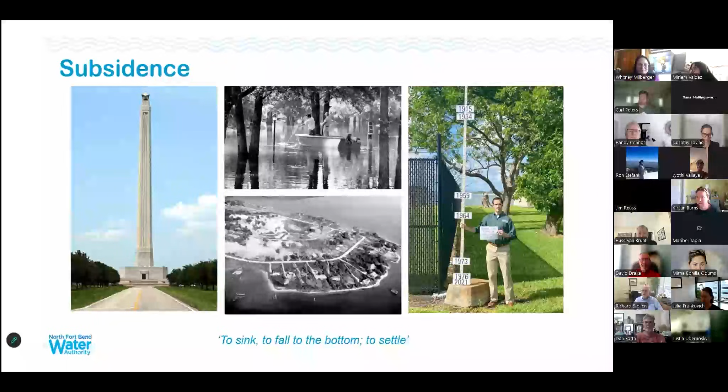And we're always looking for cool animations, ways to explain this. Julia in our office has made some cool stuff before, and I just happened to find this last week. We shared it on Instagram, but here's another animation of what subsidence is.

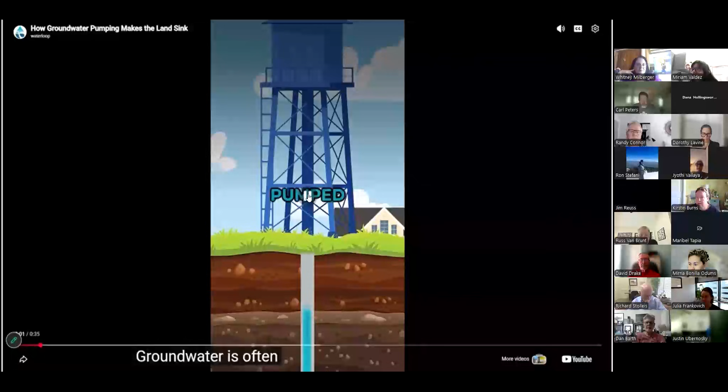Groundwater is often pumped from wells that draw from aquifers. In some areas, these aquifers are made up of layers of sand, silt, and clay saturated with water. As groundwater is pumped, water levels drop and clay and silt compact. That causes the land above to sink, a process called subsidence. That can damage buildings and roads, increase flood risks, and reduce the aquifer's ability to store water.

The timeline of how everything occurred: the creation of the Harris-Galveston Subsidence District was in 1975. I noticed it was moving westward, so the Fort Bend Subsidence District came in 1989. In 2003, the Subsidence District adopted the 2003 regulatory plan, and then we were created in 2005.

We are in Area A of the Subsidence District, and the requirement was for our submission of our groundwater reduction plan by 2008. That first conversion was 30% by 2014, which we met in a timely manner. The next one, you'll notice the difference in the time here, is 60% by 2030 - that was increased.

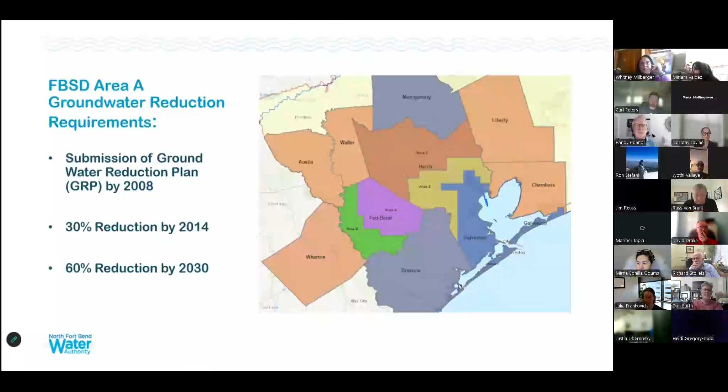Our mission, which is why we get so much into those second parts, is to provide an alternative of a plentiful source of water from multiple sources for all of us. Our board solely loves focusing, because it's so important, on the conservation and education aspect to help teach people for preservation.

Starting with the provide part real quick, just to give you an info - to start with the provide is the man who actually knows this stuff better than the back of his hand. I asked Matt Froehlich, our authority engineer, to give y'all an update on where we are with our infrastructure projects. Hey, Matt.

Good morning, and perfect timing. I was having some Zoom issues as I was a few minutes late, but glad to join everybody this morning.

Thanks, Whitney. I'll run us through some updates of kind of where we are at. I enjoy doing this because we've made a lot of progress over the years, especially on some of the regional projects, and we'll talk about some of the specifics of those.

But here on this map, we've done our best to depict some of those regional projects. Existing facilities include our Bellaire pump station, indicated with that little blue - they're little water tanks. They might be kind of hard to see on your screen, but there's a blue one right in the middle of the screen - our Bellaire pump station and transmission line. All of the blue solid lines are existing lines. Dashed lines are proposed lines that are either in design or will be in design sometime in the future.

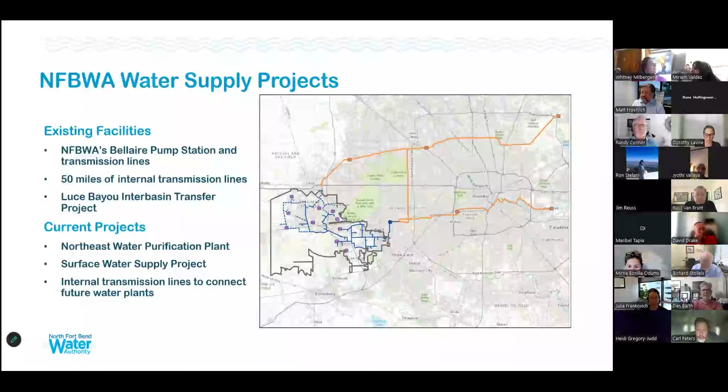So I mentioned the Bellaire pump station - the picture there is as it exists today, although if you widen this picture a little bit to the right or to the east, there is more to the plant site, but there's also some activity going on out there right now.

As it exists, we have a 48-inch intake from the city of Houston - that was that jagged line coming across. We have a 48-inch line at the very end of that that brings surface water from the city of Houston into this plant and into those 3 five-million-gallon storage tanks. We've got room on the site for 2 more, potentially a third one if we shrink down the size a little bit. We're taking up some of that space with some of the improvements that are currently underway.

To give you an idea of perspective, if you're familiar with your water plants and muds, many times those tanks are around 500,000 gallons, and this one is about 10 times larger, so not only taller but plenty wider than your typical ground storage tanks at mud water plants.

It has six 5,600 gallon per minute booster pumps. It rotates through those, but those are there to meet our ultimate capacity. Those are significantly larger than what you might see at a typical mud water plant.

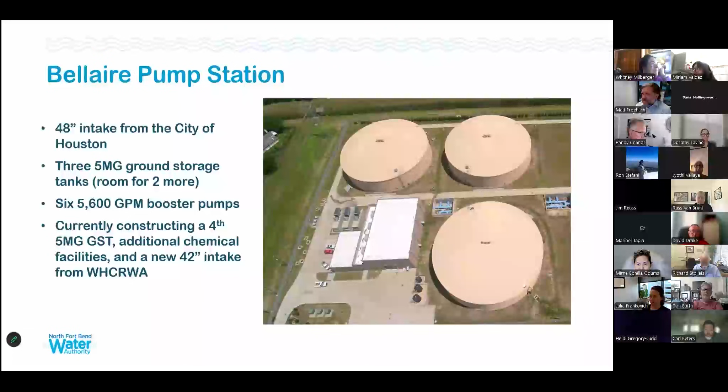All right, so our existing system - I mentioned Bellaire Pump Station with the ground storage that we have there. It's a 40 million gallon a day plant, rated to pump that much. That's where those 5,600 GPM pumps come in.

Right now we're operating, you've probably heard this in our board meetings, right around 19.5 million gallons a day. That's what our current contract with the city allows us to take. Once the surface water supply project is complete, that capacity will increase drastically, and we'll be taking a lot more water through that new 42-inch line coming in.

Our existing transmission system is shown here with the different colored line segments, and all of the aqua blue dots along the way are the water plants receiving surface water from the authority. It's over 50 miles of water line, ranging from 48-inch coming out of the Bellaire pump station down to 12-inch at some of the water plants tied in.

There are 38 delivery points serving 40 muds within the authority's boundaries. Additionally, there are reclaimed water systems within the authority that, if you attend the board meetings, you'll hear me go through the groundwater reduction plan stats each month and the level of conversion. This is where that reclaimed water comes in, and it counts as 1.5 credits.

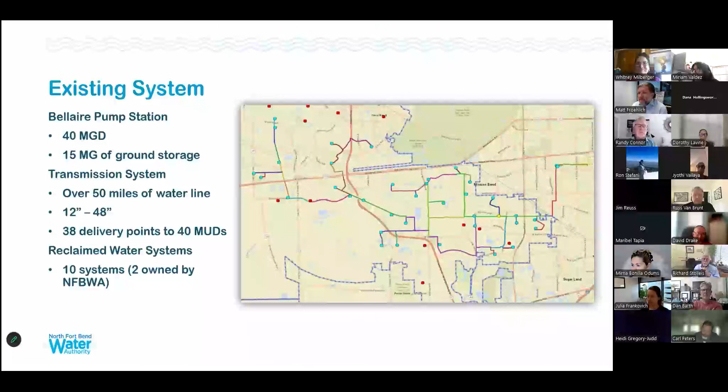So, the Luce Bayou Interbasin transfer project - here's some pictures of it under construction. It is complete and in operation, has been for 4 or 5 years now, with a capacity of 500 million gallons a day. That's a huge number when you're talking about Bellaire Pump Station pumping out 20 to 40 MGD.

That's because this is one of the regional projects being constructed in partnership with all the regional water authorities, as well as the city of Houston. So you've got West Harris County Regional Water Authority, which I mentioned, North Harris County Regional Water Authority, and the Central Harris County Regional Water Authority. For familiarity, West Harris County is basically from I-10 to 290 on the west side of town.

North Harris County is basically from 290 over to I-45. Central Harris County is just a handful of MUDs right around 45 and the Beltway area.

Also partnering in this is the City of Houston, and on their behalf, the Coastal Water Authority is managing this project along with some others. This one was a big pump station on the Trinity River, pumping water into dual 96-inch lines that go about 3 or 4 miles to the west uphill, then discharge into a series of 20-something plus miles of canals.

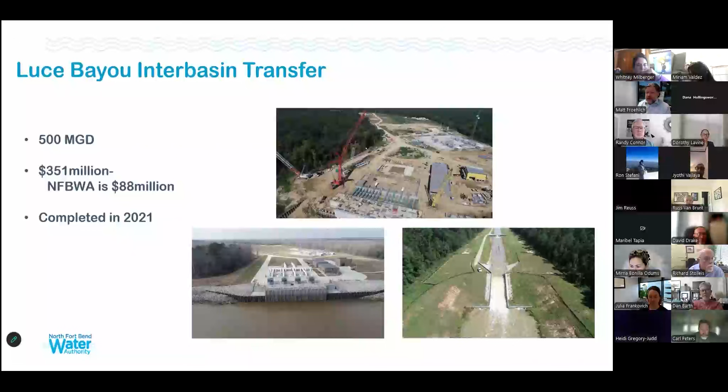That's what's pictured in the bottom right corner, a series of canals that stair step it down to the far northeast corner of Lake Houston, discharging water there so it can get into the lake, and we can pump it out at the Northeast Water Purification Plant, which is our next slide.

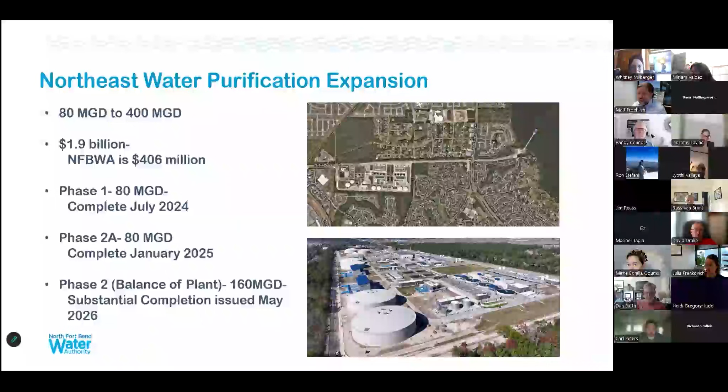A huge project. This combined with the Luce Bayou Interbasin Transfer Project, the Surface Water Supply Project, and the Northeast Transmission Line, which the North Harris County and City of Houston are building, are arguably - and I don't know that anybody's proved this - the largest regional water project when you combine them all together. Certainly in the United States, but some have said in the world. I can't prove that, but we'll go ahead and claim it. We're in Texas, we like to do stuff like that.

Moving on downstream from the Northeast Water Purification Plant is the Surface Water Supply Project, or SWIS, as I like to refer to it for short. It's composed of 55 miles of transmission line ranging from 96-inch coming out just downstream of the Northeast Water Purification Plant, down to a 42-inch line at the Bellaire pump station feed.

Coming across in the picture on the right, pretty much everything from where it says start to where the branch breaks off and heads down south along the west side of Beltway 8 is 96-inch. Then there's 84-inch running from that split over to the central pump station, the second little dot, right near West Little York and Fry Road - the central pump station, which is nearing completion as well. It's actually in operation already.

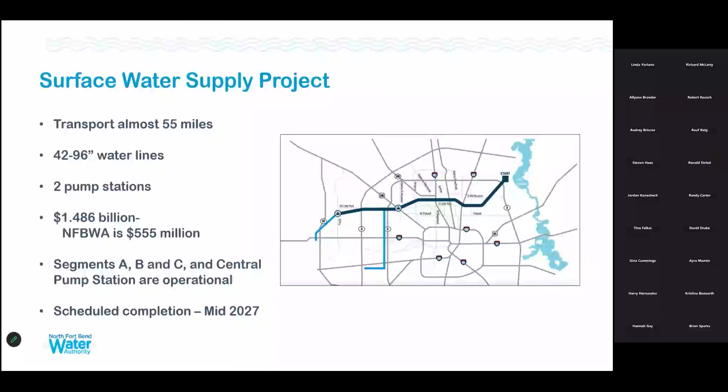A couple of projects are already complete, but those are the Kinder Morgan segments, which are the light blue line on the far west that's kind of angled down, crosses 99 and crosses I-10. That's where we'll receive water up at the north end of our system through a meter station there.

What's weirdly referred to, we jump back from letters to numbers. Segment 3 is that north-south line and then east-west line that runs along the west side of the Beltway down a CenterPoint corridor near Willcrest, kind of up and down from Westheimer, and actually not too far from our home office here. And then it hangs a right and heads west to the Bellaire pump station. That's a 42-inch line that'll feed us there.

That Kinder Morgan line is a 66-inch line. Overall cost just shy of 1.5 billion. North Fort Bend shares 555 million.

I mentioned some of it's operational. Some of the remaining projects are complete but aren't in operation because either something upstream or downstream of it isn't complete yet. That's all moving forward, and schedules show that all of that, as well as the repump station - the dot right in the middle of the screen at West Little York and Fairbanks North Houston, just north of 290 - is scheduled for completion in mid 2027. By that time, we'll be fully operational and should be receiving water at both ends of the project.

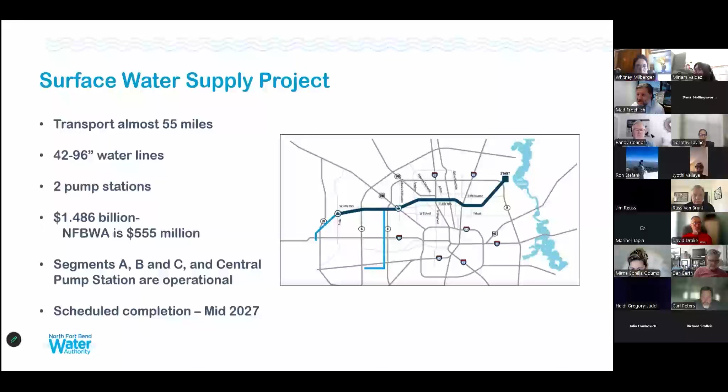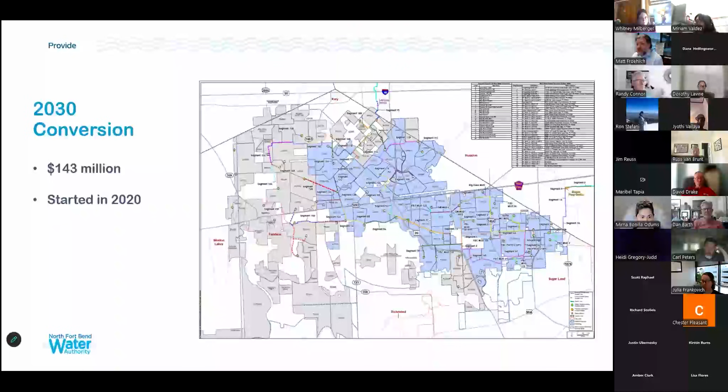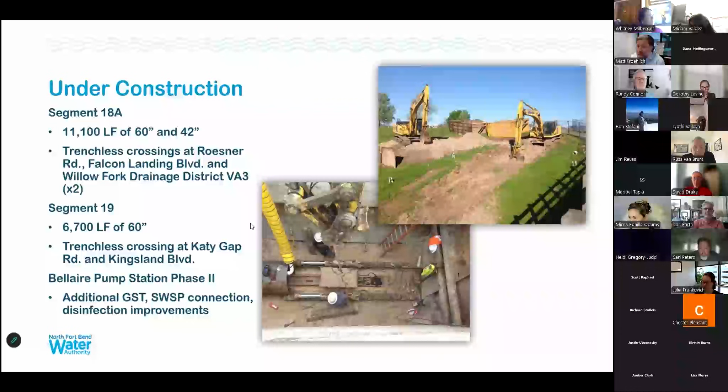Some of our projects that are what I'll call shovel ready, or very close to it, might just need some updated approval signatures if they've been on the shelf for a little bit. That includes segment 13B, which runs into the Cross Creek Ranch area and will serve one of the City of Fulshear's water plants. Segment 13C Phase 1 runs along Fulshear-Gaston and will serve MUD 229, the Candela neighborhood, a new subdivision down there.

17A runs down Greenbusch. It's a 48-inch line. It's going to come off of 18A and then tie into the rest of the system going to the west. And then 17C is another continuation of that, a branch off. If you're familiar, I think it's a Kroger at the corner of Westheimer Parkway and Greenbusch. It runs behind that and ties into a water plant, so it's a short run there.

Looks like we've got a question from John. You want to go ahead, John?

My question is, what material are you using for these pipes, and what is their estimated lifetime? Great question, great question.

Anything that's 20-inch, 24-inch, and smaller is likely going to be PVC. North Fort Bend has been in the practice, at least as long as I've been involved with it, of not specifying exactly what material a contractor has to use. We like to leave it open to a number of different materials that would work and are acceptable to us, and then just allow the prices and contractors to be as competitive as they can be. On that smaller stuff, PVC is going to be the most competitive, so it's I'd say a 99% chance that stuff's going to be PVC. Anything above that can be a number of different materials. Pre-stressed concrete pipe, steel pipe is the most likely one that'll come in. They don't make PVC that big. That's why it's all the smaller stuff.

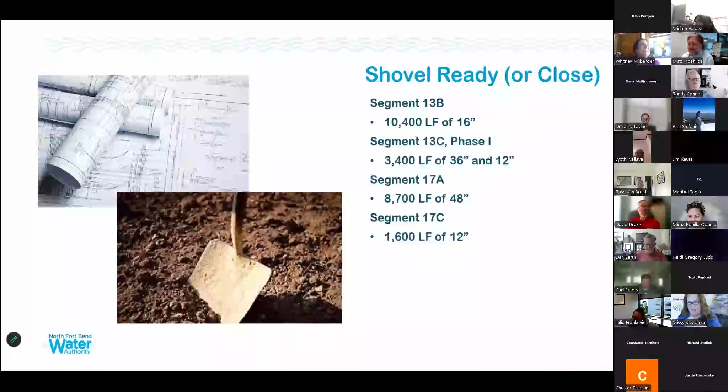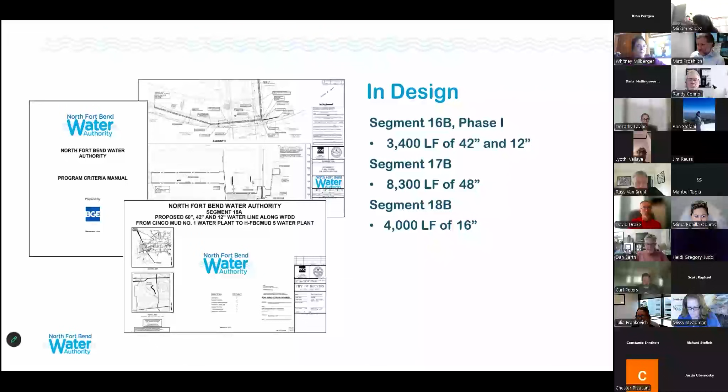So those are all progressing through design. Like I said, there's going to be some more a little bit further off. I think that might actually be our next slide, Whitney, if you can take us to the next one.

But yeah, a lot of activity. Like I said, I think we'll be in a pretty big phase of construction here over probably the next 5 years, with a steady flow of projects going to construction, and even carrying on after that. A lot of design going too as we push a lot of this forward.

Biggest holdup on these, and I know a lot of you that attend the board meetings have heard me talk about it and have seen what I'll admit is slow progress on some of it, is the easement acquisition.

We really like to be in our own easement that protects these facilities. As John asked earlier, it helps them have a longer service life, because by being in our own easement, we can control anything else that goes in there.

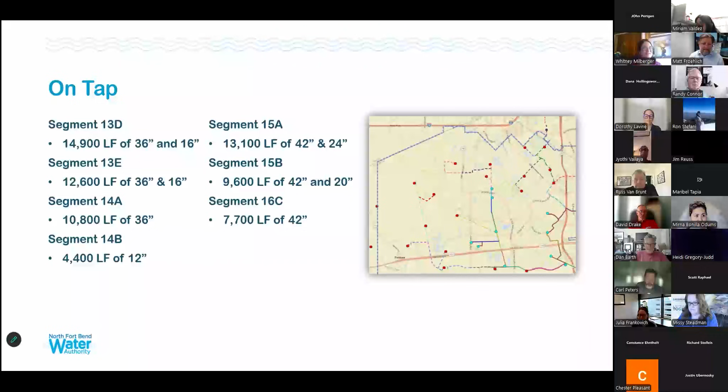We are now going to talk about the Water Provider Conservation Program while we are all here today.

Brief overview: conservation was pertinent from the inception of North Fort Bend, created in 2005, started public outreach the next year in 2006. We had our mobile learning lab not far thereafter. We started the Wise Guys, which most of you participate in, in 2011. Had our mascot, Larry the Talking Sprinkler, right after that, which has undergone a makeover, which most of you have seen.

But what our directors did notice was we had all this outreach, but we needed something to directly incentivize our direct customers, which are GRP participants. And that's your boards - these are all the MUDs and all of our participants. And so that's when the Larry's Water Conservation Toolbox program started.

It started with that same idea - if you were successful in the program, it used to be a point system. The next year you would start receiving 10 cents per 1,000 gallons on all of your usage. So the credits started being distributed in 2017 to everyone who was successful in that 2016 program. So we did the 5 years of the Larry's Water Conservation Toolbox.

After that 5 years, we had stakeholder feedback. We talked to you all about what was working, what not, and we realigned with the same incentive, but renamed it, because everybody's like, who's Larry? What's a toolbox? I don't understand. So we made it a little bit more direct to the Water Provider Conservation Program.

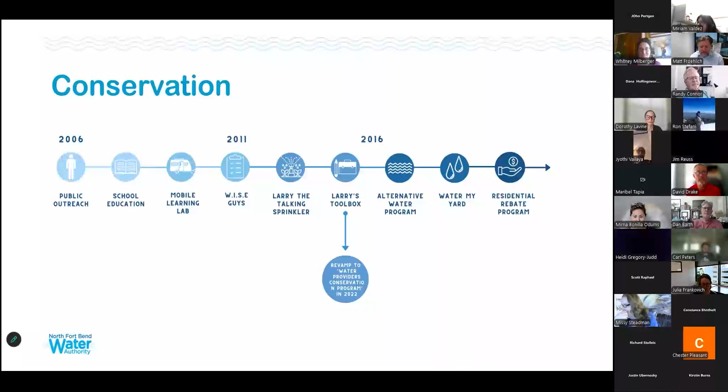Back in 2021 - I'm not going to touch on this today, but we also do have that alternative water program. Matt touched on it, we have 10 systems right now. If you're planning anything reuse related, please reach out to us. We're always interested to talk to the community about that because it's a great part of conservation.

And with that, again, if you have questions, anything, just feel free to unmute or raise your hand, because I'm hopeful in the next couple slides this is a group discussion, because that's what we're hoping for. When we revamped the program 5 years ago, our goals that we came out with were to help increase board directors' involvement.

Because what we saw in the first 5 years was a lot of this was just falling on the operators, and the operators are happy to do the work. But what we were seeing in the community was there were still directors who didn't even know about the conservation program. However, when it would become time to get a rebate, directors would ask, where's the rebate, but not even know why they should have been getting a rebate.

It is our job, it is our hope that we serve sort of like in that pyramid, where we help teach you all, the directors, about conservation education, and then it funnels down to the community to actually get that messaging across. So we found that it was very important to get the board directors involved in this so we could help disseminate that information - of course, to increase water saving potential and to increase community awareness about conservation.

And so with that, we are currently identifying our goals for the next 5 years. And this is where, if you want to raise your hand - I have all the initiatives I'm about to go through, but this is y'all's show. I'm just here to talk on slides. So we are currently looking at that.

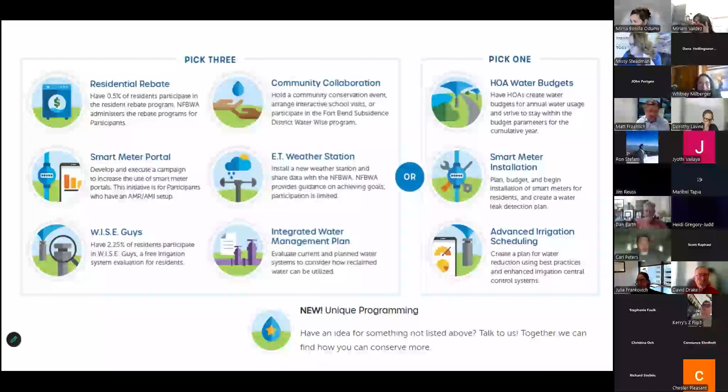But we want this program to be effective. We want it to be easy, not because we're giving money, but effective. And if you have ideas, we do have that unique program, but as I said from the beginning, our board wants this to be your program. For the first 5 years, we provided the points and what you had to mix together to make it a success. But it was our thought that we've taught the districts, given them different tools, and it's our hope that you take them and make it your own program for your community. We just want to be a resource for you. So there is that on the website. And if you have anything to say, you're free to unmute.

To finish this off, Whitney, can I just chime in there? Of course. On this program that we're currently in, it's been about 5 years now.

And the biggest change to this program was requiring a conservation committee, which I believe you all are a part of, so you're very familiar with that. Feedback on how that's going, ways that program could be improved, or maybe ways that if it's too much of a burden, like we want to hear that also. So please include that feedback in the survey responses. If it's going really well for you and it's made a difference, please also include that too. It'd be great to hear. But yeah, that's something I would like.

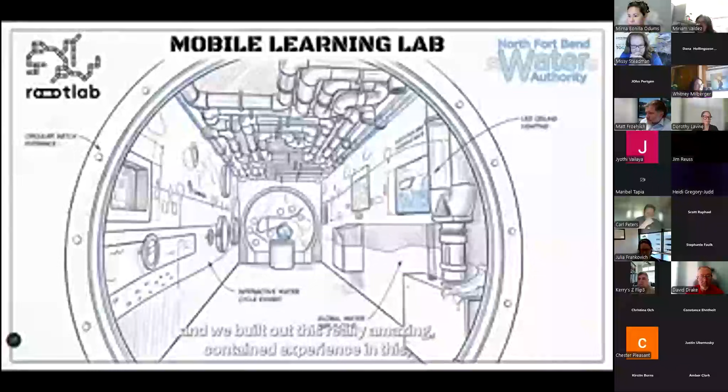We were approached by North Fort Bend Water Authority to revamp this trailer that they had some exhibits in. And we spent months concepting first, and then we stripped the inside of that thing, and we built out this really amazing contained experience in this, I think it's a 17-foot long trailer, and it is packed with interactives. It's essentially a whole science exhibit from a museum in a box.

The experiences inside - we love wheel-based interactives because there's something that happens to your brain when you touch a thing and move it, and then something else happens. It gets your gears going. So there's several of those kinds of interactives throughout.

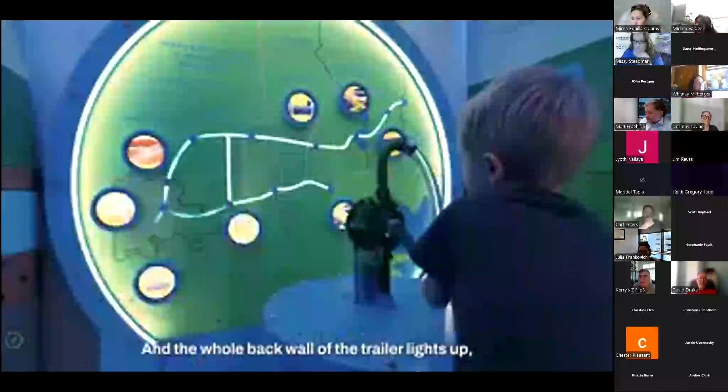As you get to the back of the trailer, there's this really amazing pump interactive, and the whole back wall of the trailer lights up, and it tells this story about where the water's traveling, how it's getting where. And then there's 5 or 6 screens that have little animations on it, and the fact that stuff happens when you're touching these objects, I think really helps drive the educational part of it home.

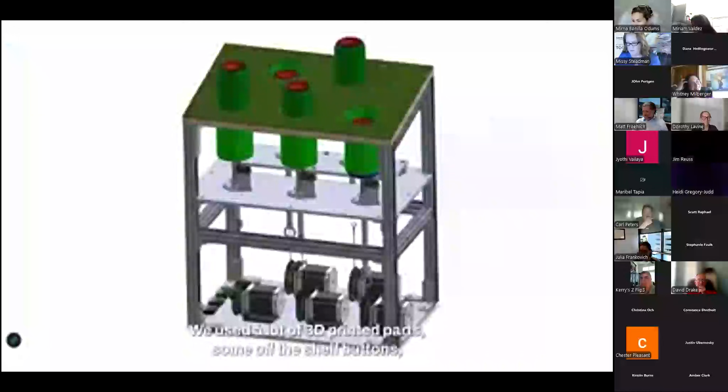And then as you walk back from the back of the trailer, there's 2 more really kind of more fun experiences that we've developed in-house that we really love. The first one is, it's literally a whack-a-mole. Essentially, we built it the same way that they did the traditional one, but we just shrunk it down. We used a lot of 3D printed parts, some off-the-shelf buttons to make a robust yet pretty economical and super fun interactive.

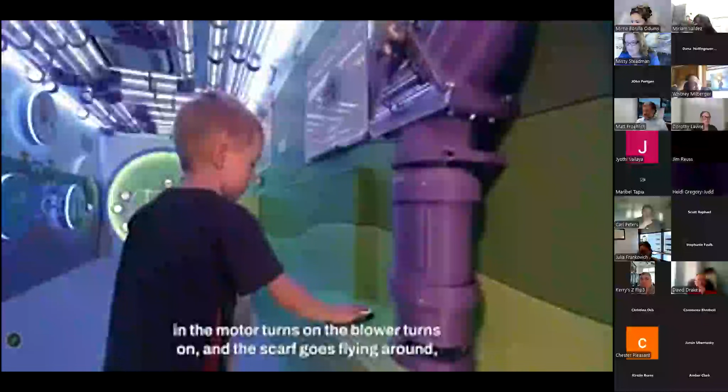And then the last element is the scarf blower, which is installed on the ceiling of the entire trailer. And there's 2 paths that it can go, and you press the button and the motor turns on, the blower turns on, and the scarf goes flying around. And you watch it go throughout the whole trailer, and you want to try to track it.

And I think it's different from how especially children interact with screens. There's this tactile element - they influence this thing to happen. And then I think that creates this kind of really fun, joyous moment. And just watching my son play with it was like a revelation. Lo and behold, it creates joy.

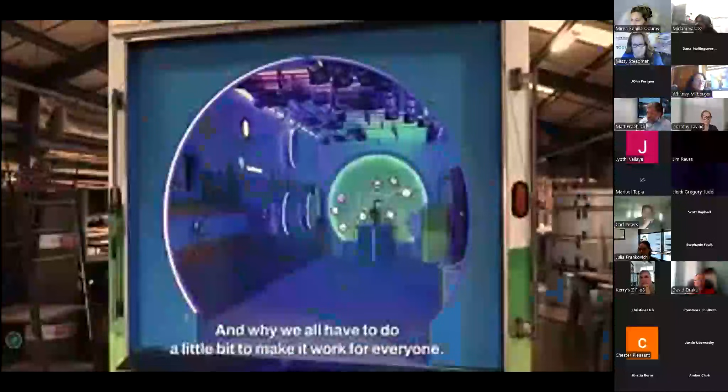North Fort Bend Water Authority is going to be taking this trailer to all their events. They do a lot of outreach with local schools, so this will be parked out there for primarily elementary school age kids. who'll come and experience this thing and hopefully walk away with not only a fun memory, but also hopefully some amount of takeaway of understanding where their water comes from, why conservation matters, and why we all have to do a little bit to make it work for everyone. That message sticks longer and has a better impact when we can pair it with an experience that is unforgettable.

And there you have it. So we hope you'll reserve it.

The other item we're working on - we've met with a couple of districts and operators right now, working on having a community rain barrel sale.

I've worked before, over a couple of decades in this industry, with a vendor out of North Carolina. They have this rain barrel - I think it's the Ivy model - that usually retails for about $160, but if you do these municipal events with a bulk order, you can get them at a discounted rate. This is an example from Round Rock; I used to partner with them and do these.

Basically, they make us our own website, so it would be rainwatersolutions.com/NFBWA. It'll be an asset where all of your customers can go and order rain barrels, and what we do is have a 1-day pickup event.

We've been working internally on a location. We thought we had one, but found out it's not going to work. Basically, your customers will be able to come in on a Saturday between 10 and 2 p.m. if they pre-order the rain barrel, since we're getting a lot of requests, especially after all these rains. We're hoping to do it in spring of 2027, early spring.